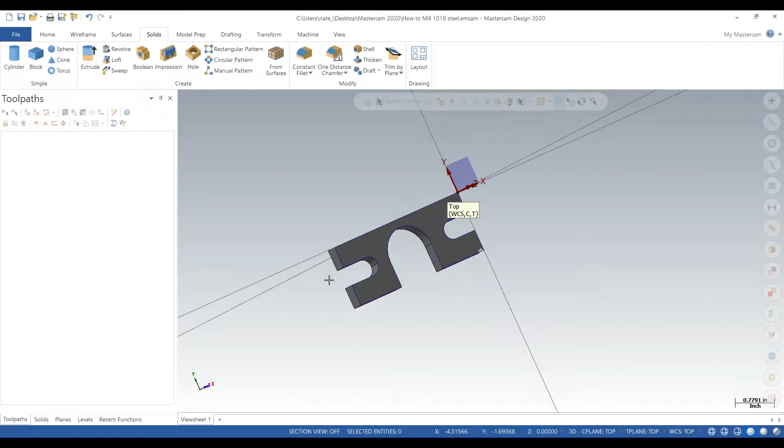Alright, here's our part. Pretty interesting looking. And it needs to be milled. And we're going to pretend like it's 1018 steel.

So there's a couple things we need to do first before we can start milling it. That is to create some extra levels with wireframe and then create a new plane, so it makes it a lot easier to start milling.

So we'll go to levels, type in 2, hit tab, go down to name and type in wireframe. It's our first step in creating a wireframe level. We'll name level 1 solid.

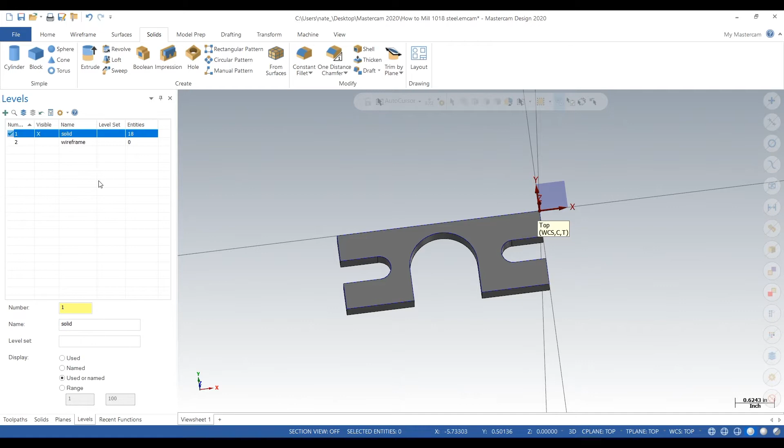We'll select our part, go to wireframe, and click on curve all edges. Hit the check mark. And that gives us a bunch of wireframe on all the edges of the solid.

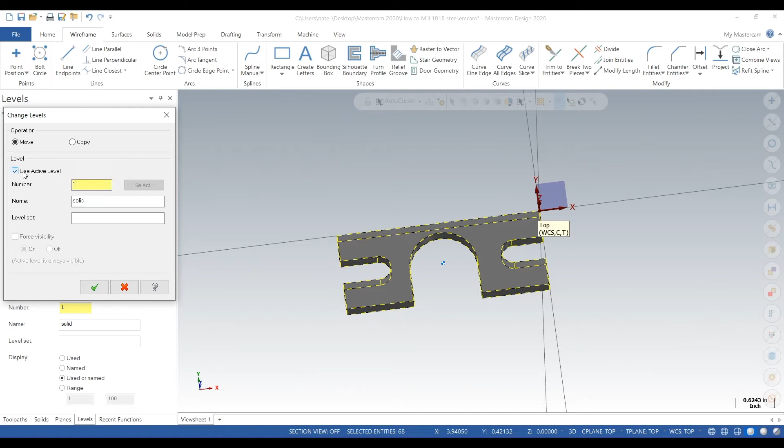Next, we click on select all wireframe, go to change level, deselect use active level, and type in 2. That should put it on our wireframe level, and it is. So that's looking good. So far, so good.

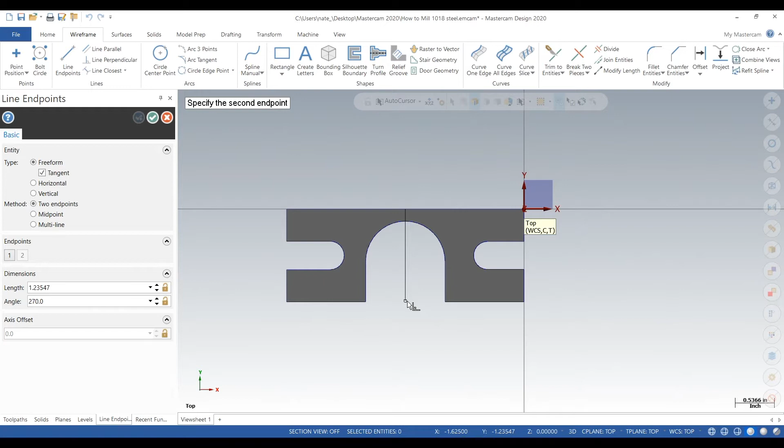Next, we're going to draw some wireframe to find the middle of the part. Okay, and we'll create a point right in the middle of the part. That looks good. We're doing that so we can

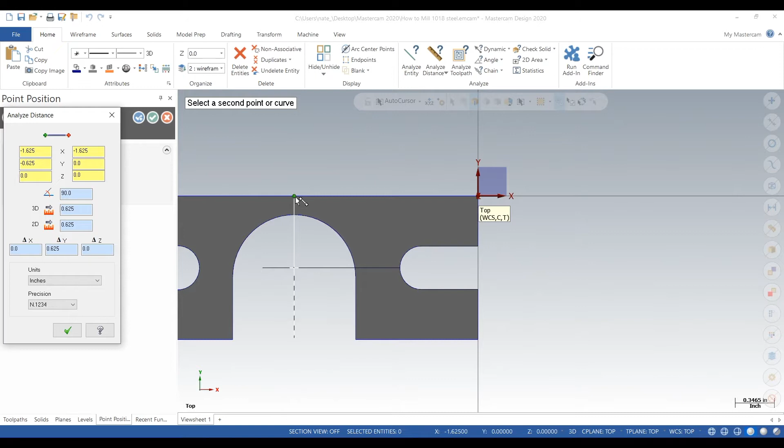create a work coordinate system that is in the middle of the part. This is just the way I like to do it. Right now I'm just measuring and making sure that point is in the middle.

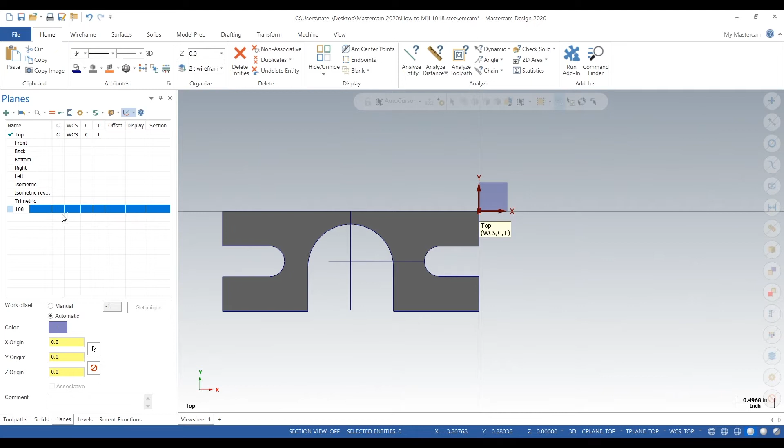And it is. So we can go to planes, duplicate the top plane, name that 100 or op1 or something along those lines. Edit the work coordinate system, click on the ball, then click on that point we drew, and that puts our work coordinate system right in the middle.

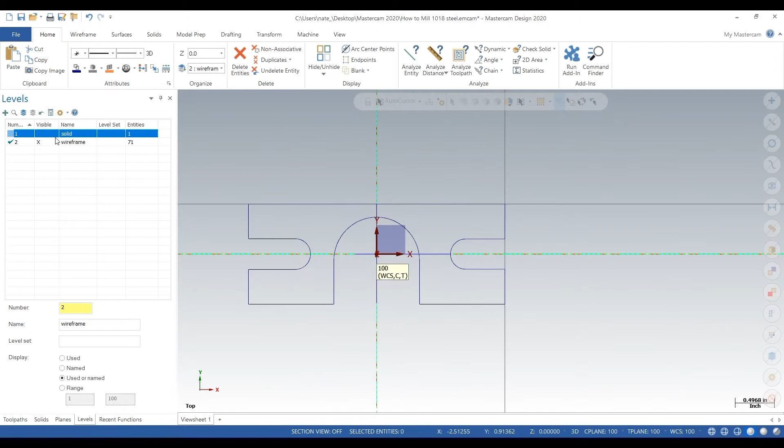So we'll delete those lines we don't need. So we got our wireframe, our work coordinate system ready. That's looking good.

Next, we are going to draw our stock. We're going to anchor to the center. And next, we'll type in our width and our height.

So we'll just click somewhere on the page, go to width, type in 4, height 1.75.

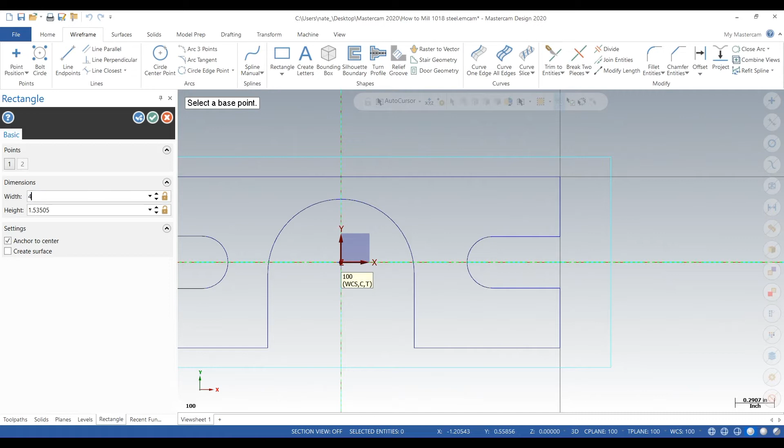And we drew our stock because we're going to do something called dynamic milling. Dynamic milling is easiest when you have your stock drawn and wireframe to work with. That's the easiest way to set up dynamic milling. So

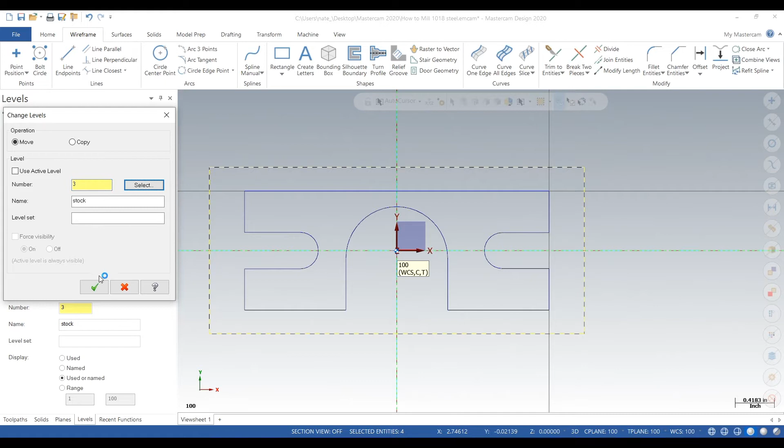we created another level. We'll move the stock to that next level. Type in 3. There we go. We got 3 levels, a solid, a wireframe, and a stock. It's looking good. So we're pretty much set up to start milling.

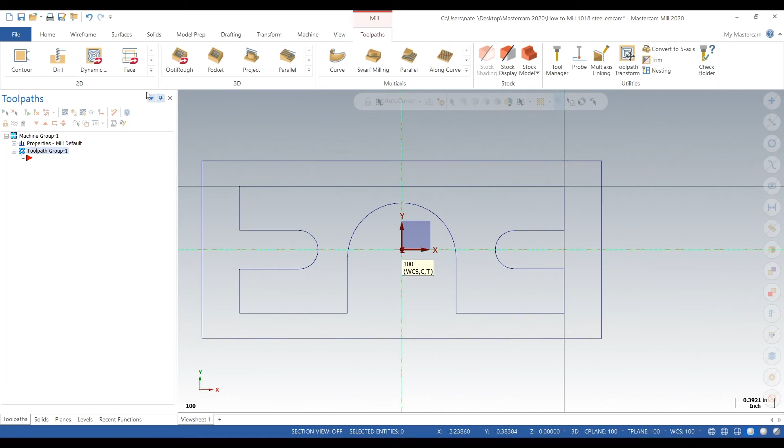So we go to Machine, Default, and now we will start milling this part. Click on Dynamic Mill. Machining Regions, click on the Stock.

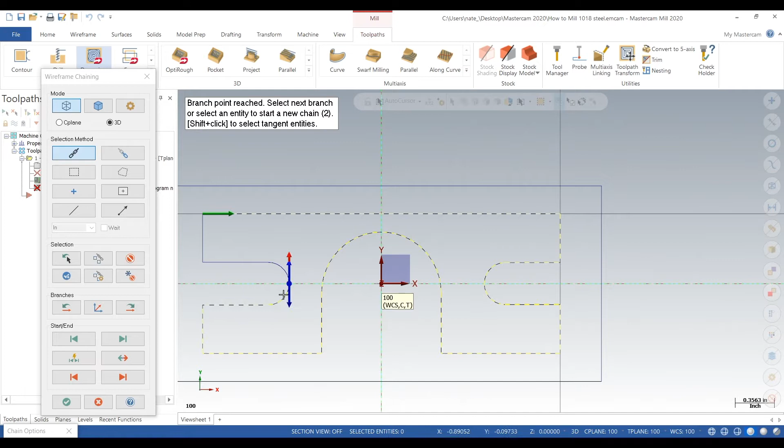Avoidance Regions, let's click on the Part. Click on all the edges. And this tells the dynamic toolpath not to go into the part. It's looking good. Hit the check mark. Click on From Outside. There we go.

Go to Tool. Select Library Tool. And click None. Click on End Mills. Click the check mark. Let's find a 1/2 inch end mill.

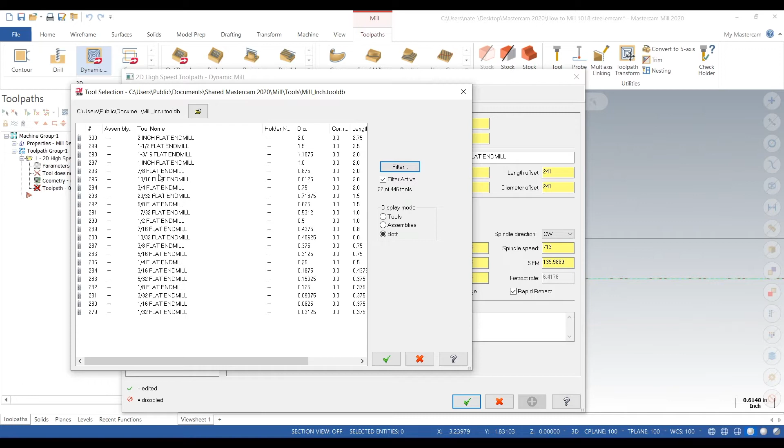And feel free to pause the video and rewind it and do whatever you got to do because we are going pretty quick here. So we make that tool 1.

We go to easyspeedsandfeeds.com. We go to ductile under cast iron. We find our speeds and feeds. Go 200 surface feet, 1/2 inch diameter, number of teeth. It's a 4 fluter, feed per tooth, 3 thou.

So we found our inches per rev and our RPM, so we just type those in. 12 thou inches per rev, 1,528 RPM. That gives us a feed rate in inches per minute of 18. Okay.

So the best speeds and feeds to use is always from your tool manufacturers. But if you can't figure that out and you can't find their speeds and feeds, easyspeedsandfeeds.com is a great place to get you started. Okay, so we type that in.

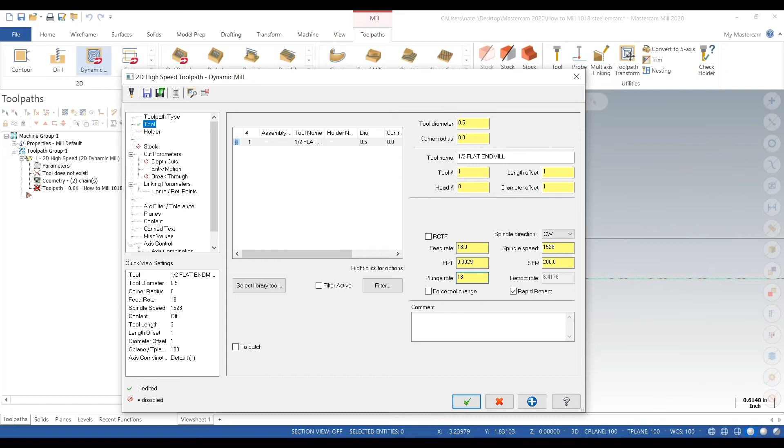We go to cut parameters. We're going to change stock to leave on walls to 0 and the floors to 0. Step over, we'll change to 25 thou. Keep it light cuts. Okay, that all looks good.

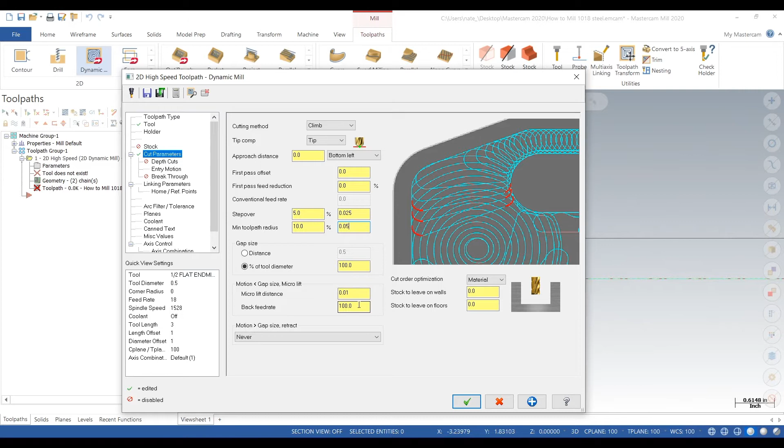Linking parameters. We'll click on the bottom of the wireframe. Turn everything to absolute.

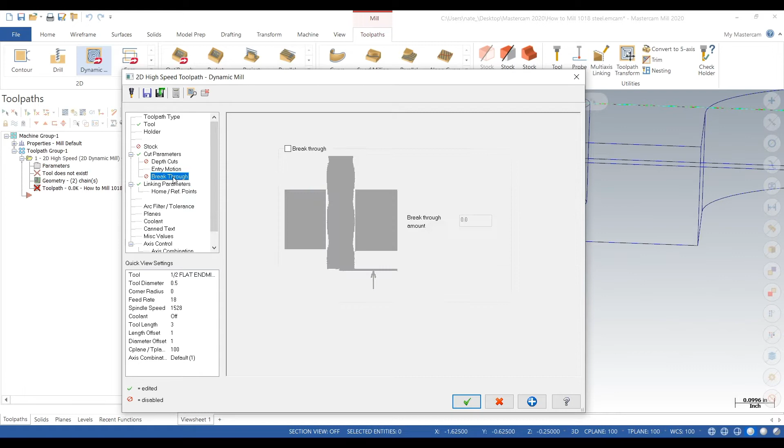Our back feed rate will change to 400. So when it starts going in trochoidal motions, it will go 400 when it's not in contact with the part. So

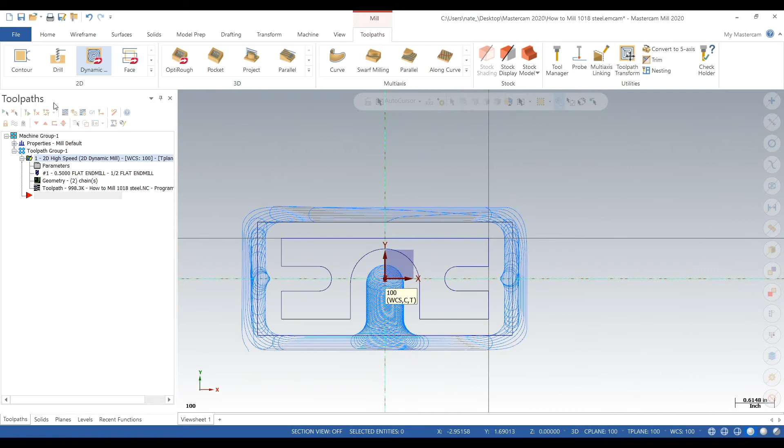we will run the back plot, and it's looking good. 25 thou cuts, 18 inches a minute, 1,528 RPM. And as it retracts, that will be going 400 inches a minute.

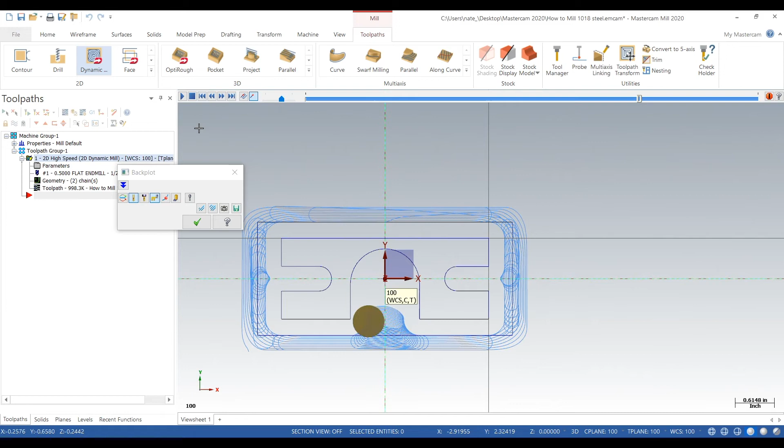So you're cutting at 18 inches per minute, and then when it retracts to go back around, because it needs to be climb cutting, right there 18 inches a minute, and then when it retracts around, it's 400 inches a minute. So that saves a lot of time. And that's that back feed rate you can adjust.

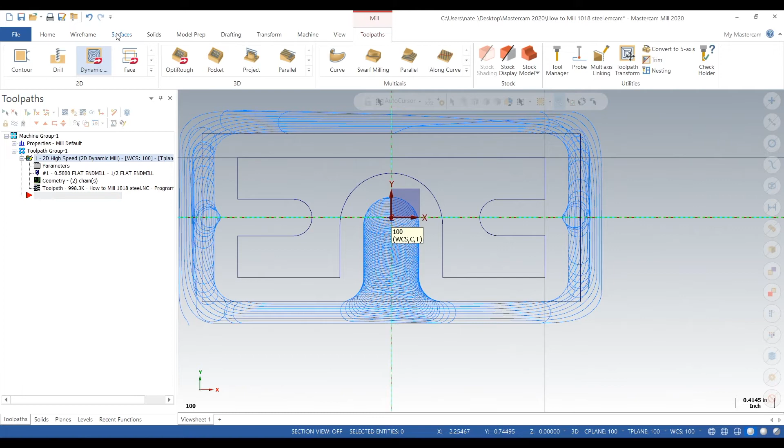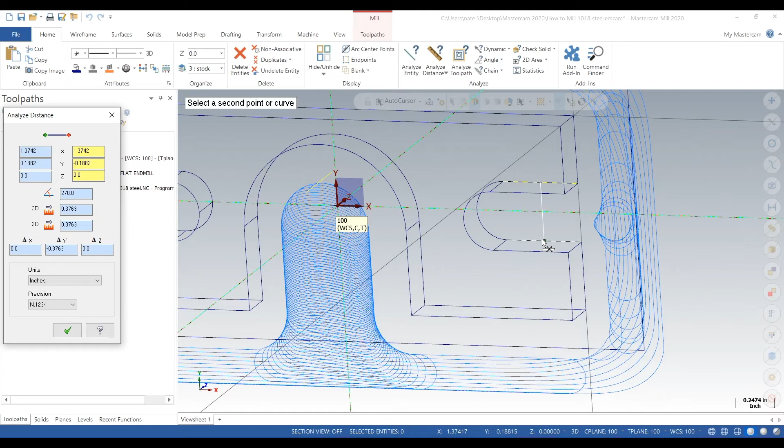So we're going to analyze the distance in these little slots. And after we analyze it, we're going to figure out what tool to put in there. So our 1/2 inch end mill would not fit, so we're going to have to switch to a smaller end mill and try to machine those regions by themselves since everything else is machined.

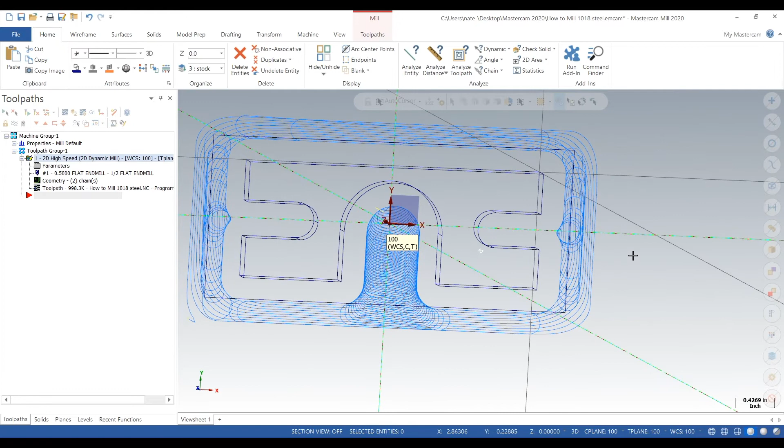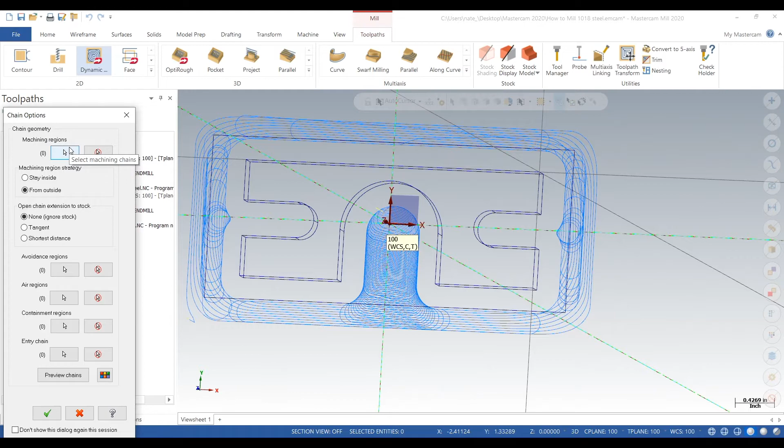We will give dynamic mill a shot. Click on machining regions, hit the check mark, and we'll click on Stay Inside.

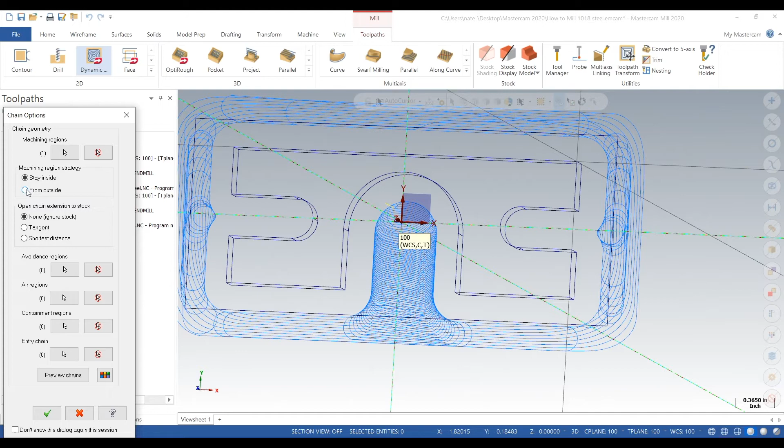We go to Tool. That 1/2 inch end mill is too big, so we have to switch tools.

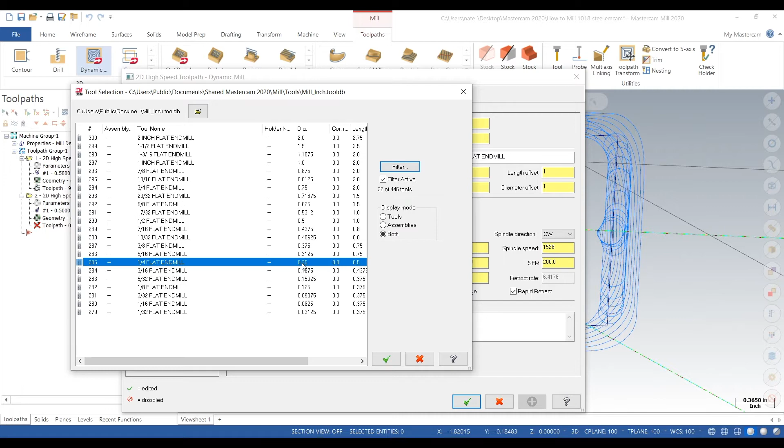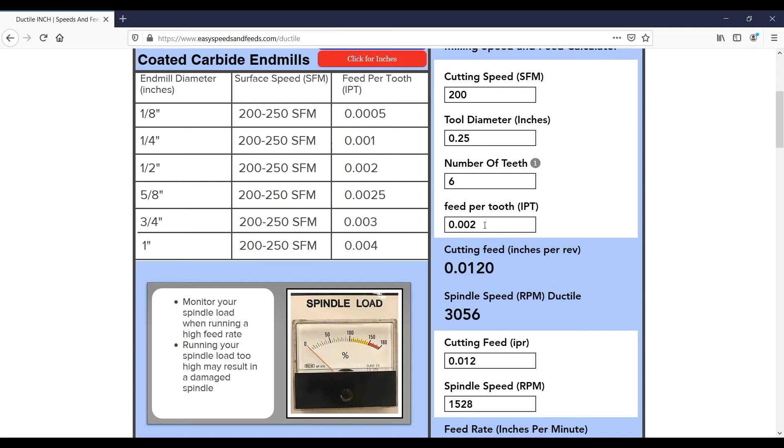Go to Filter, have end mill selected, and let's select a 1/4 inch end mill because the slot was around 380 thou, so a 1/4 inch end mill should work pretty good. Go back to easyspeedsandfeeds.com to find a good starting point. It's a 1/4 incher, 6 fluter. We'll adjust our feed per tooth and diameter, also the inches per rev and the RPM, and we get 3056 RPM and 18 inches a minute.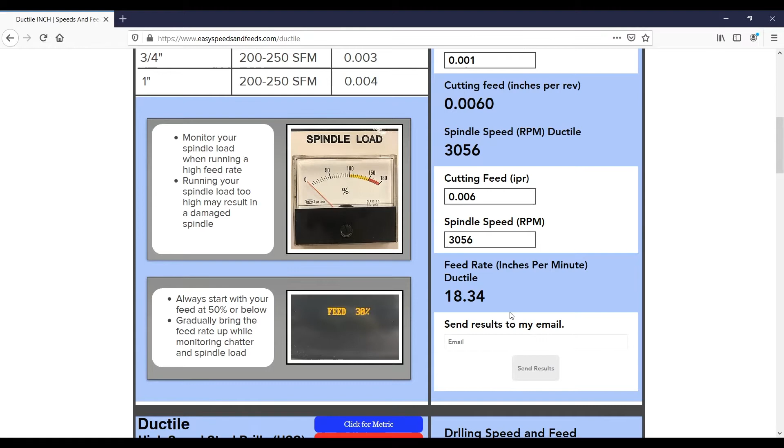So we type that in. That all looks good, we're just double checking right there. Cut parameters, step over 12 thou. Now let's examine what we did.

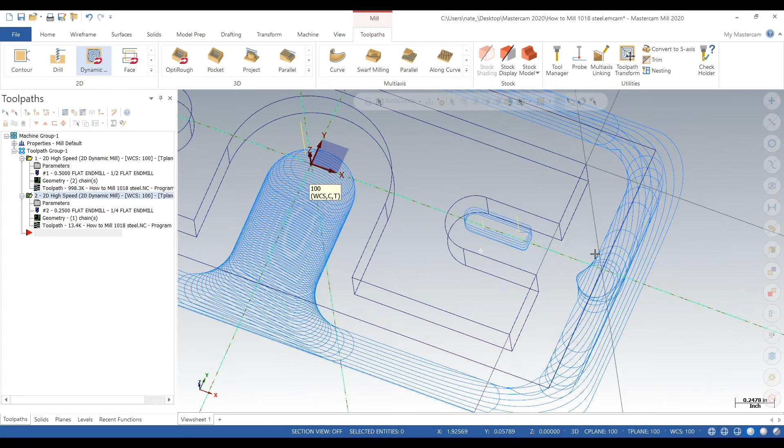So that looks not right. It's not going down a 1/4 inch, it's starting too far above. So we have to go back into parameters, adjust some things, and hopefully we can get it to machine right.

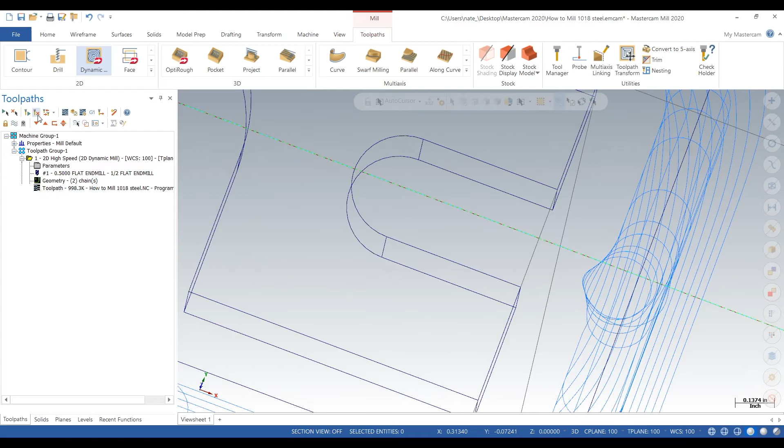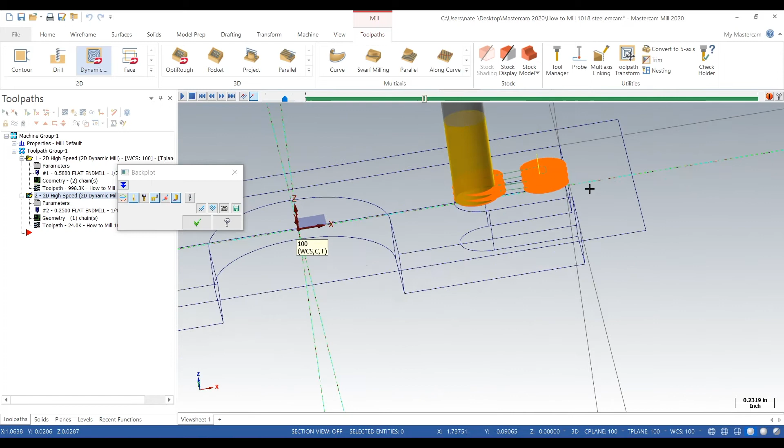So we're back in parameters, go to linking parameters, our depth, click right there, that'll be a 1/4 inch. Regen that up, we'll backplot it, and that looks pretty good. It's using like a ramping motion to do all the machining, which will work.

But it is leaving some area unmachined, so we have to address that before we move on.

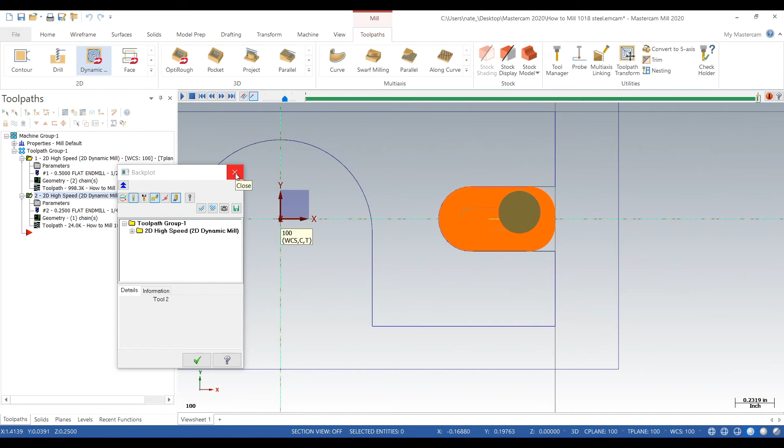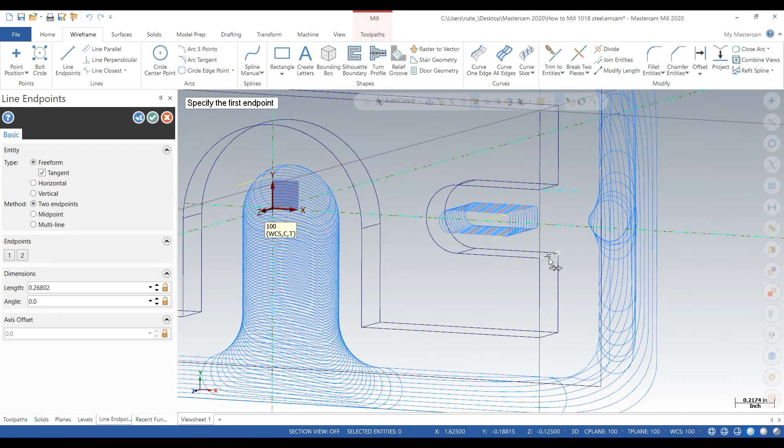What we can do is extend the wireframe and then rechain this slot. So we extend the wireframe on that side of the slot, and we extend the wireframe on this side of the slot. Hit the check mark, go back into geometry, deselect that, and rechain it.

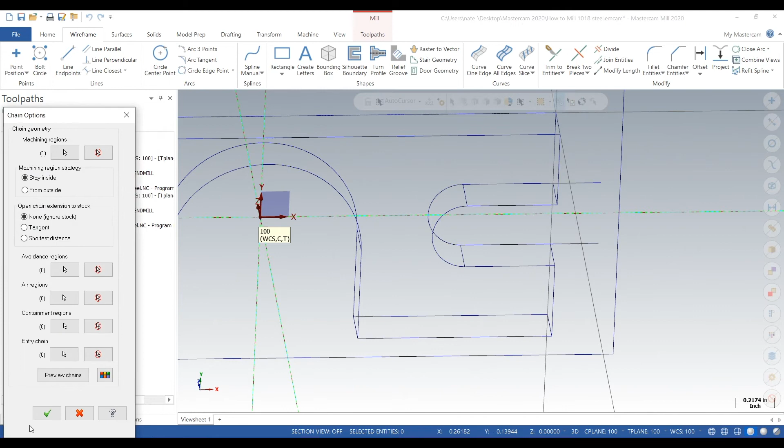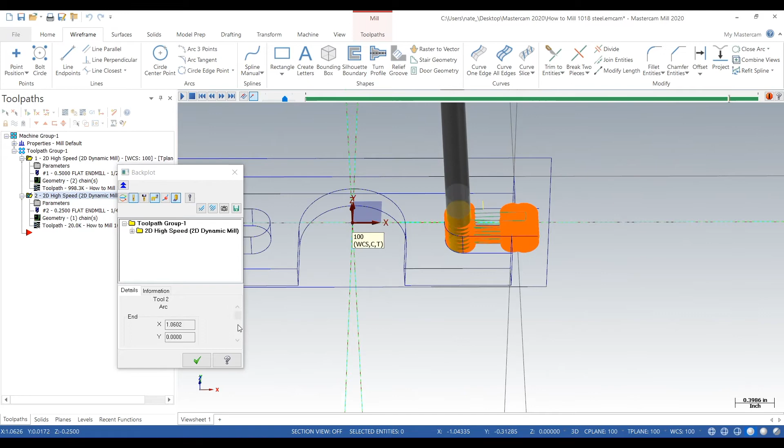Okay, backplot. That's looking a lot better. Now this is just one way to deal with a slot like this, there's lots of ways to do it. But that's why I like working with wireframe and creating wireframe from the solid - you can just create lines that help you get things done.

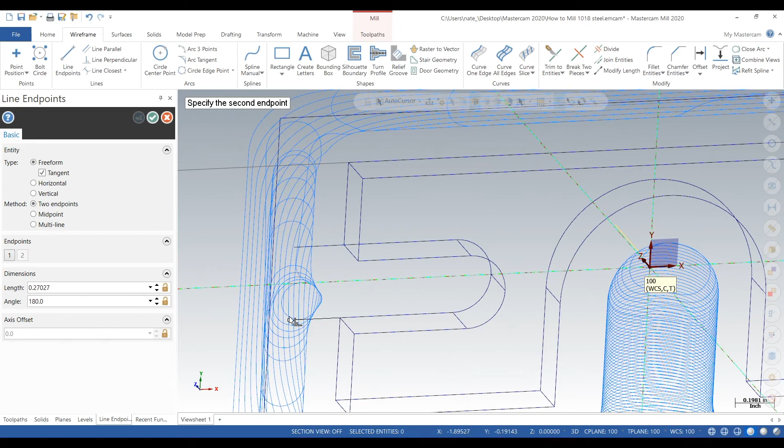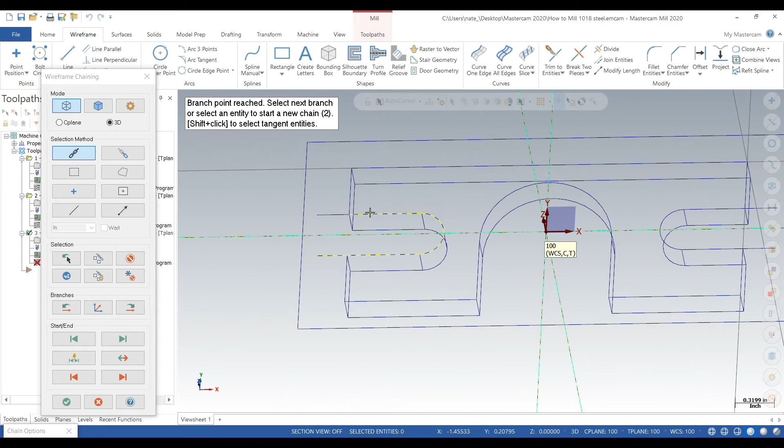Okay, so we're going to try the same thing on the other side. Create some more lines. We'll copy and paste this toolpath because we like everything about it except the chain, so we deleted the chain in the new toolpath. Now we're rechaining it on the other slot. Hit the check mark - just like that, we got the other slot done.

So things are going good, got most of the part done. I would periodically save while you're doing all this - it can add up to a lot of work.

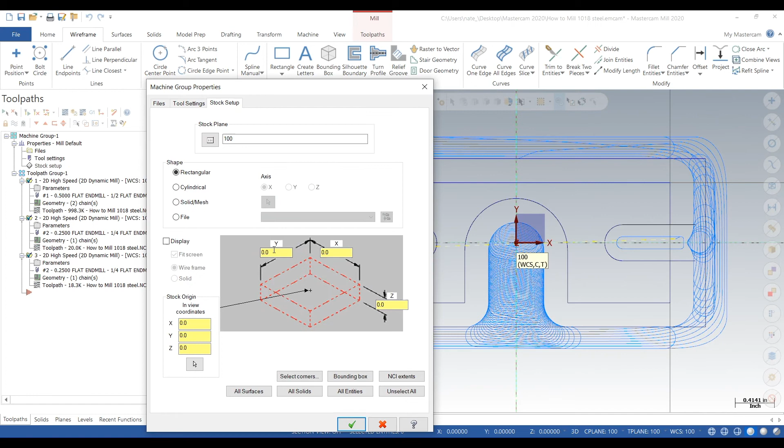Next we want to add some stock. We'll click the center and we will type in the stock manually. So we will just measure the Y, that's 1.75. Go into stock, go from the center, Y 1.75, X 4, the Z 0.25, click the check mark.

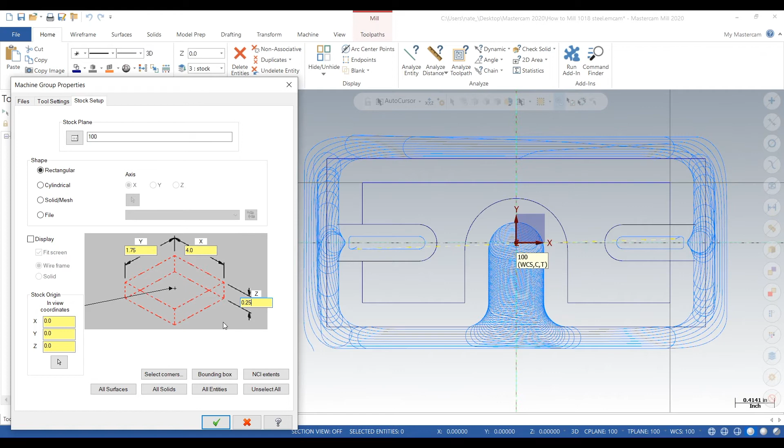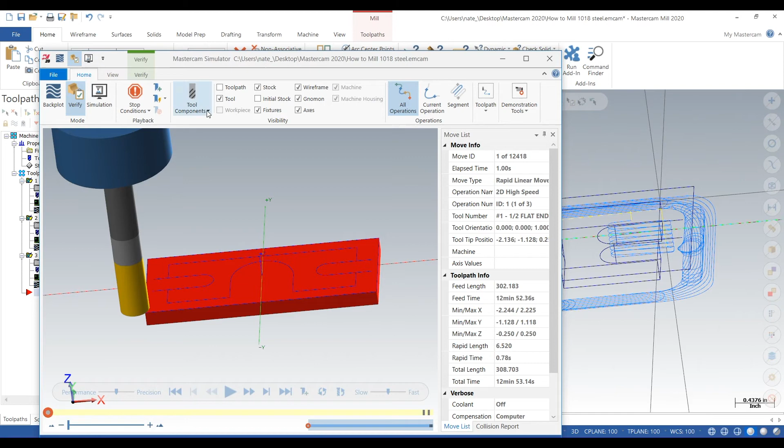Now we can go into verify, see what we got. So that looks correct. Go to Tool Components, turn off the holder, and click Play. So it's doing its dynamic mill, taking 50 thou cuts with that 1/2 inch end mill, avoiding the smaller slots because it can't get in there.

Doing this big slot in a trochoidal motion, feeding at 18 inches a minute while cutting, and then coming back around 400 inches a minute. That's that back feed rate that we adjusted.

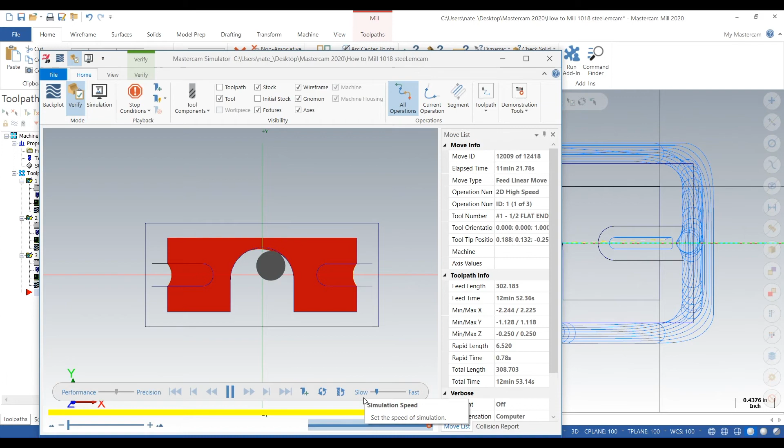So there's our 1/4 inch end mill doing a ramp dynamic mill on both those slots. That's looking good. And one more thing we want to add is a finish pass, because dynamic milling doesn't really give the best finish - it gives kind of a choppy finish, something you can definitely notice.

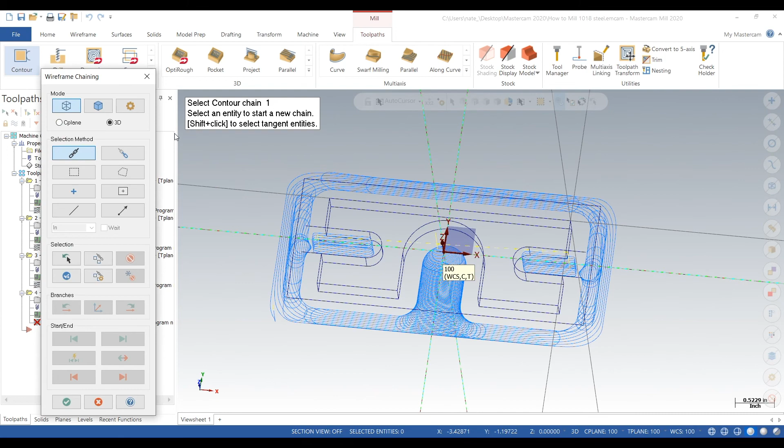So we're just going to chain the whole thing, and we're going to do a finish pass with a 1/4 inch end mill so we can get into all the slots. So we go piece by piece, make sure we chain the whole thing.

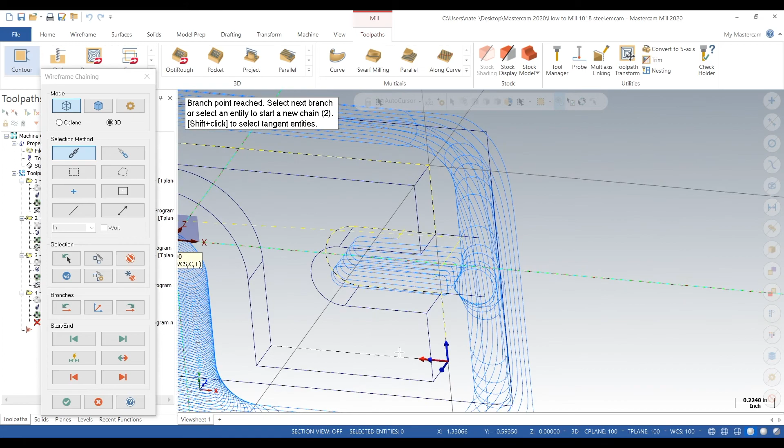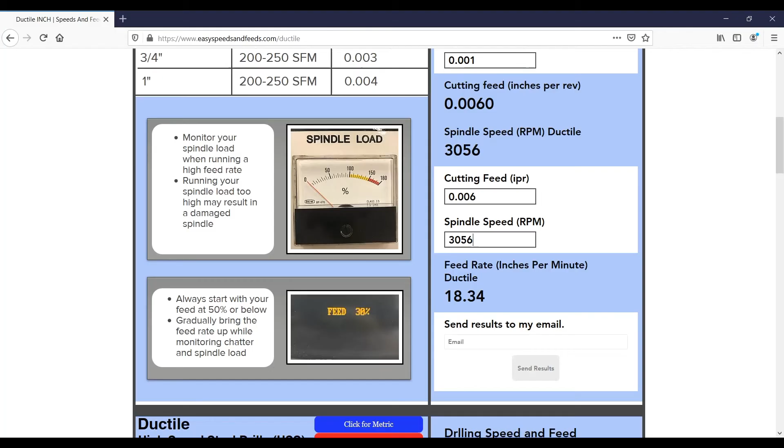That's looking good. Hit the check mark, go to Tool, select the 1/4 incher, put in our speeds and feeds from easyspeedsandfeeds.com, 3056 RPM, 18 inches a minute. Cut parameters: depth minus 0.25, multi-pass passes, we can do 2.

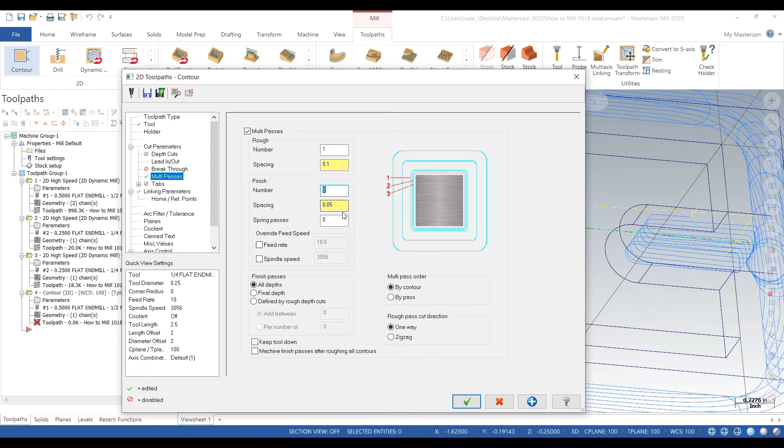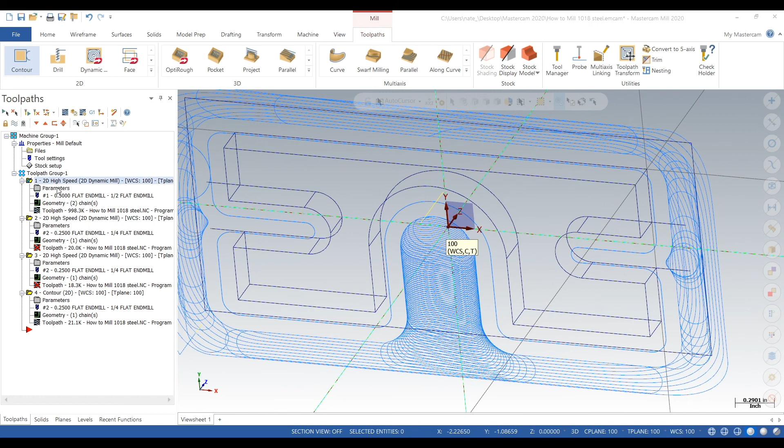So we go into the parameters of our other toolpaths, go into the cut parameters, leave stock on walls - we'll leave about 10 thou per wall, so our finish pass takes out 10 thou. And again, dynamic milling leaves a rough, choppy finish, that's why we're adding all the finish passes.

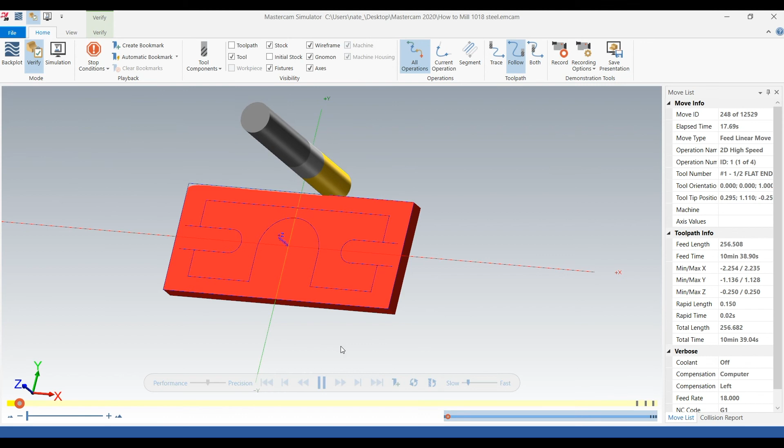So we go into verify, click the play button. We can speed things up because all we want to see is make sure that it's having that finish pass. If we zoom up, it looks like it's definitely leaving about 10 thou per wall, which is good.

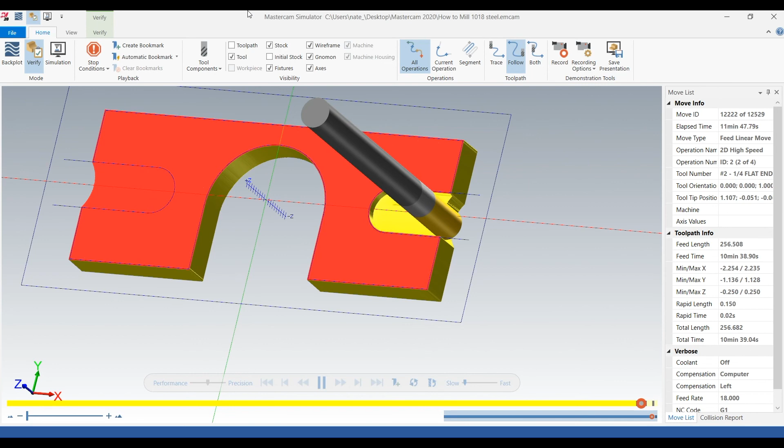There's that dynamic mill using a ramp method for those slots, leaving 10 thou per wall. There's our finish pass right there, giving it a nice clean finish.

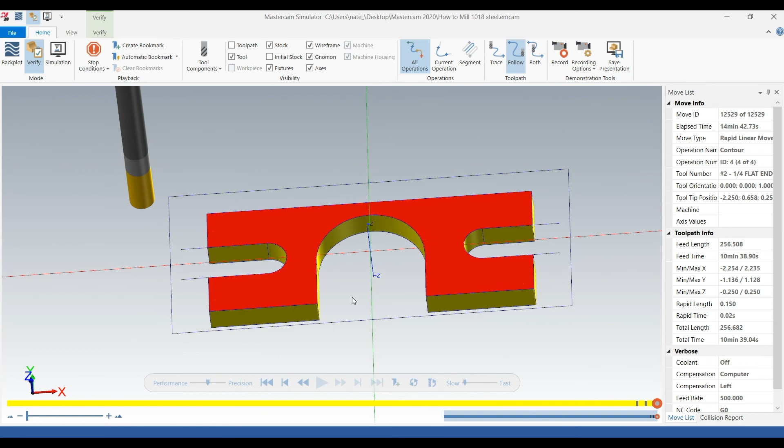So there we go, there's our 1018 steel part, all milled out. As you can see, we didn't do much contouring because the metal is so hard you really don't want to load your tool up, so dynamic milling is a great way to go at a part like this.